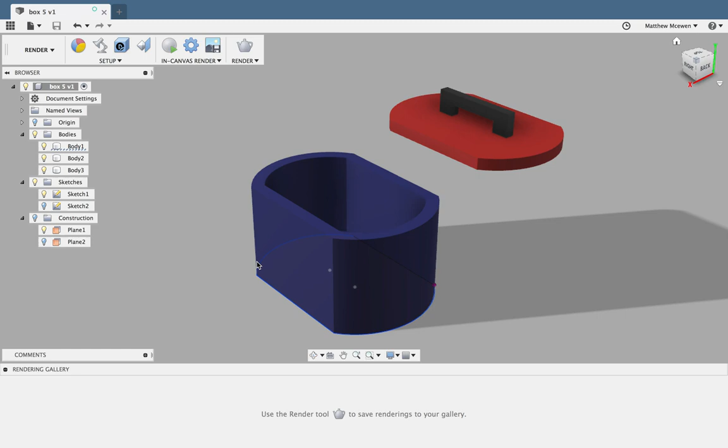So this is how to build a box using Fusion 360. I'm going to show you how to create this kind of a simple box with a lid.

Alright, we're going to start with a new design. I've got to turn on my origins. I'll be talking about the browser, which is up here, and the timeline, which is down here. First, we're just going to create a sketch.

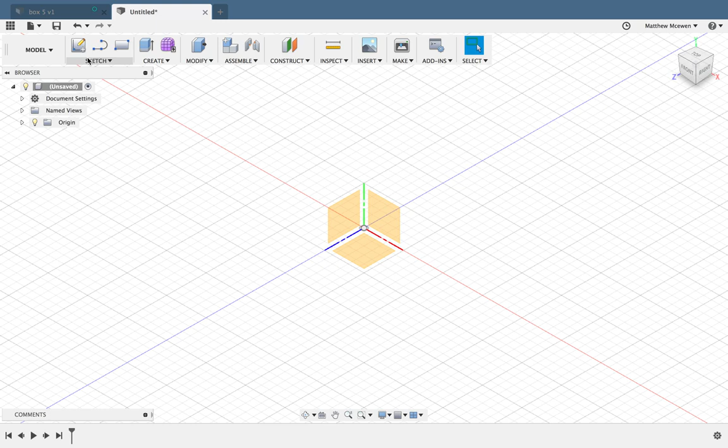Click on Create Sketch. We're going to click on the bottom, and we're going to draw the shape of our box. You could use rectangles, it could be circular, or a combination of those. I'm just going to do kind of a combination. Hit Escape if you don't like the tool you're using.

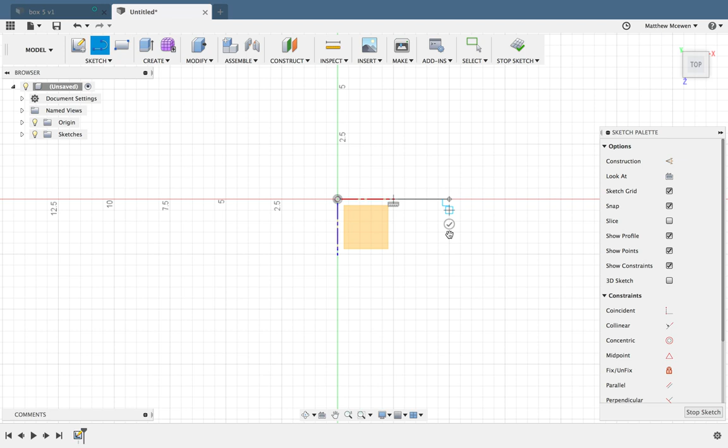L for line. I'm going to draw a line 5 centimeters like that, and then I'm going to get a circle tool, a center diameter circle. I don't know, like there, there. You could just use whatever you want.

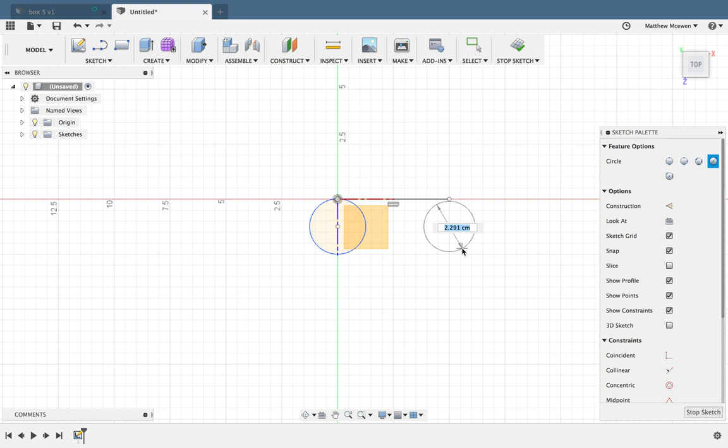I'm not going to do that. I'm going to use the arc because I really just want an arc. Boom. There's 5 centimeters, so let's bow it out a little bit. Do the same over here.

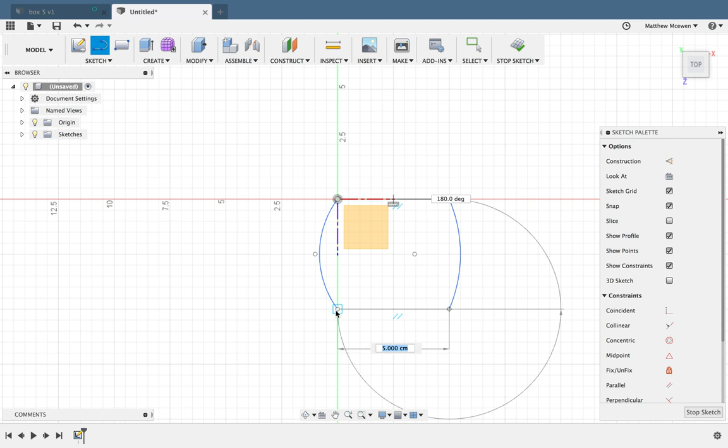Okay, and then I need to do some lines to connect this to this and this to this. Okay, so it is now a shape. I can stop the sketch.

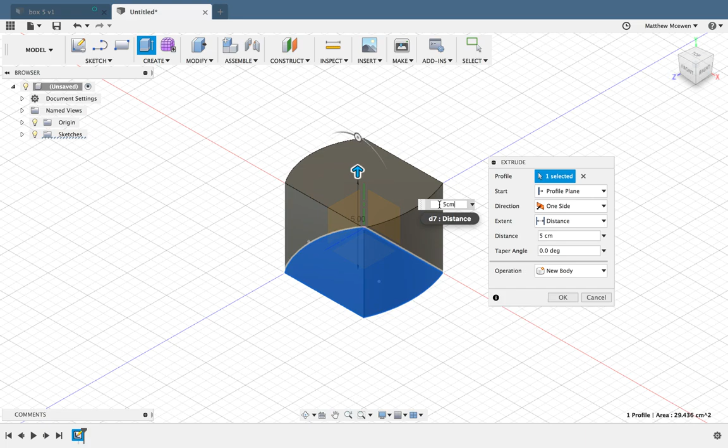I can go ahead and go to the Create menu, and I can create an extrusion using this shape. I'm going to bring it up 5 centimeters, which I can just type in here, or whatever. Notice over here in the bodies I have one body.

I can click on the word Body 1, and it highlights it. I also have the sketch, which is now off. It's the first sketch I made, and there's the sketch, and there's the body extrusion I did.

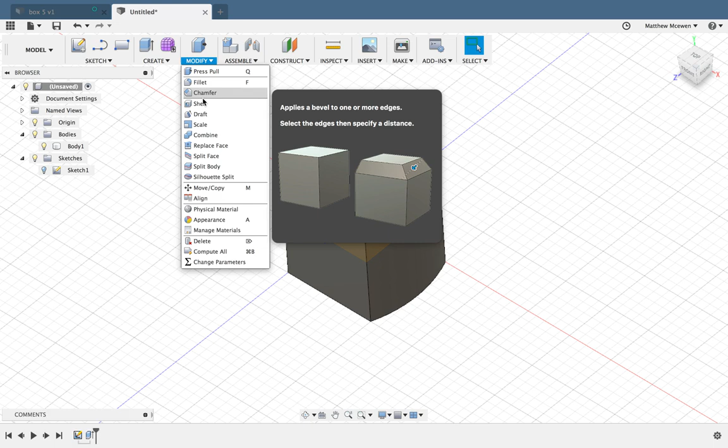Now I need to make the box hollow, so I need to modify an existing body. It's called shelling. It removes material from the interior and leaves the walls. So here's the tool box, asking which face or body you want to shell.

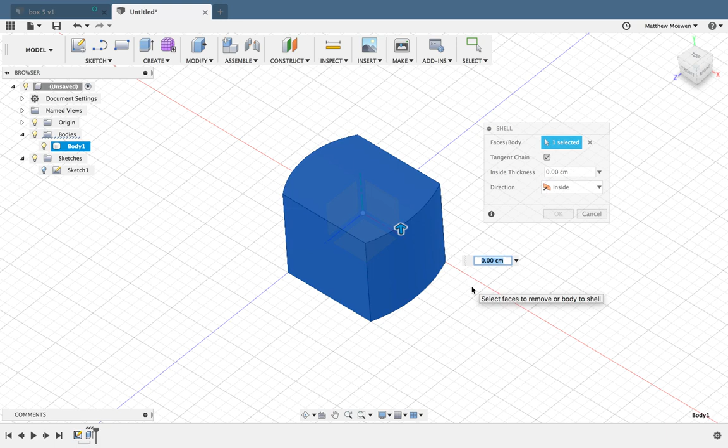So I'm going to go over here and just click the Body 1. If you just start clicking on faces, it starts to pick them, which can or may work, but you see how it says 5 selected? I want the whole body, so I want the body.

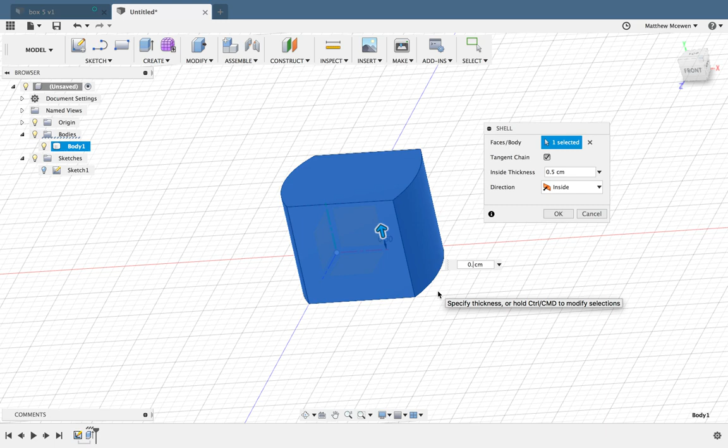And it's just asking how thick do you want the walls. So I'm going to say, let's make the walls half a centimeter - well, maybe a little bit smaller. Let's make it 3 millimeters. Enter. I think that's right, we'll see what happens.

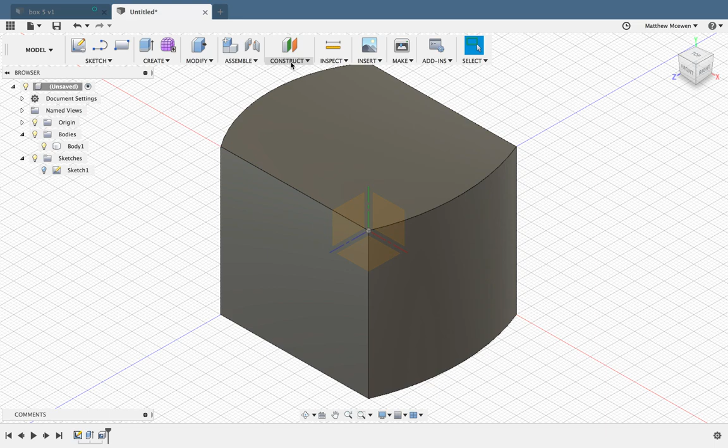Okay, now I need to cut a lid. In order to cut a lid, I need a construction plane that's a little bit below the top of the body. So I'm going to create a construction plane, an offset plane, and I'm just going to make it go down. Let's make the lid half a centimeter.

Hit OK. Now over here we've got the construction plane I just created, and again the timeline's being updated. Now I want to split this body in half using this construction plane as a tool.

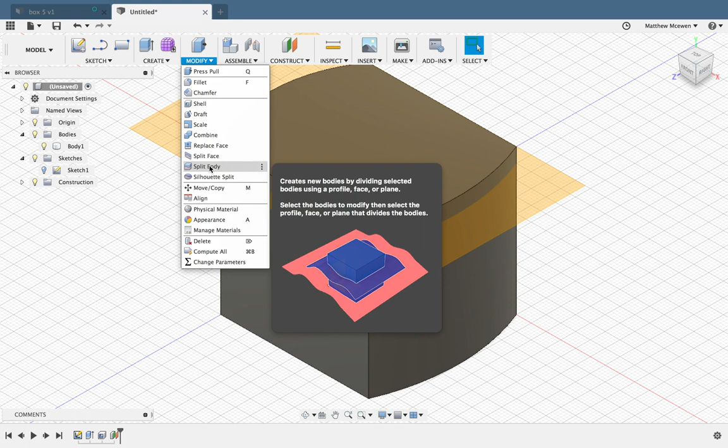So again, in here it's very simple. It says split body, creates new bodies dividing selected bodies using a profile, face, or plane. So again, what body do you want to split? I want to split this one. Click in this tool - which tool do you want to use to split it?

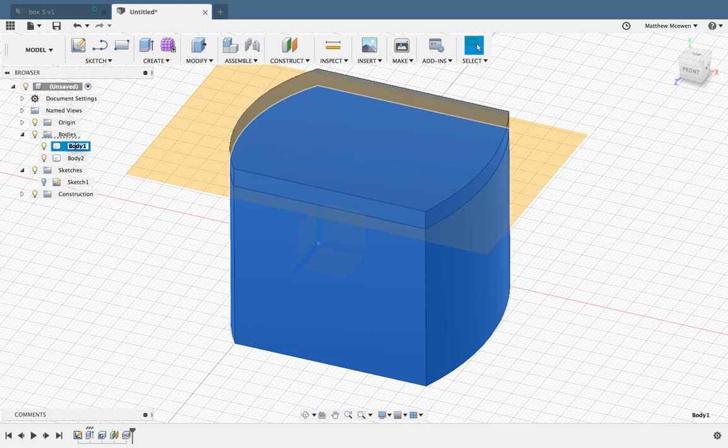I'm going to click on the plane. The cutting surface comes up, and now we have 2 bodies - we've got the top and the bottom. Now I can name this: this is the box, I'm just going to type in the name. This is the lid. Okay.

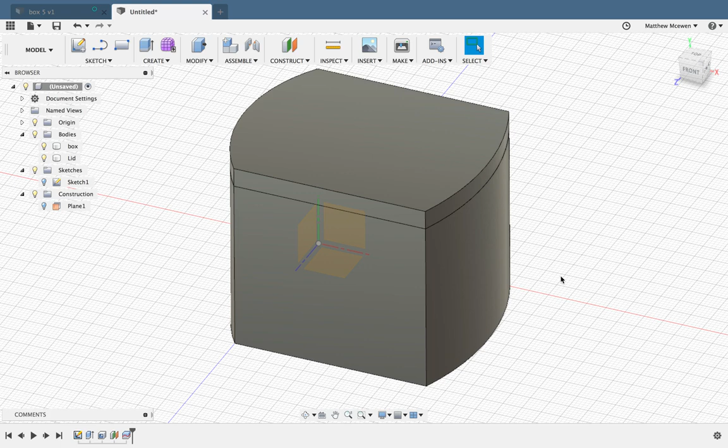I can turn the construction plane on and off if I want to as well. And you can see if I move it, there's the box. Again, to move, I use M. I click on the body I want to move, and I can use the arrow key just to move it out of the way, which actually I'm going to do.

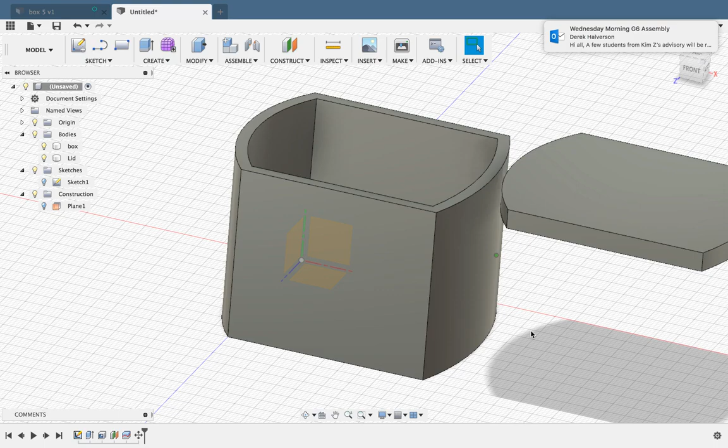There we go. Okay, I'm going to look at the bottom. Good, all right. So I think that's pretty much it.

I'm going to create a little handle here, like I did for this one. Show you how to do that. I need to actually draw a sketch. I could easily use something like this, I could just create a lid like that. I was just using a box, I just created it on top of that.

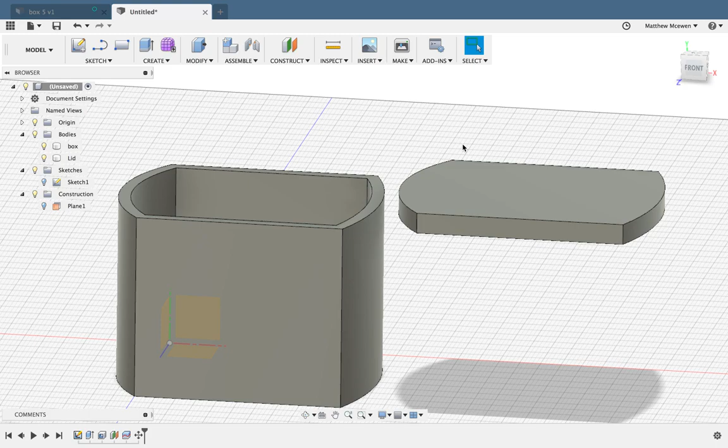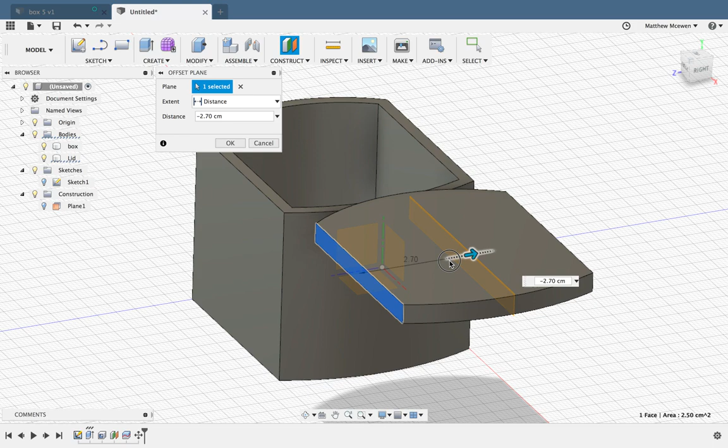Or if I wanted to do something a little more interesting, I need to be able to sketch something in the middle of this lid. So I need a construction plane, not an offset one. Or actually, I could just do an offset plane. I could push this into the middle, which I know is 5 centimeters across, so I know where the middle is. But there's also a choice for a mid-plane, so it creates a plane between two faces. If I click on both of these, do you notice how that plane just appeared in the middle? Now there's a construction plane right in the middle over here, done in the timeline.

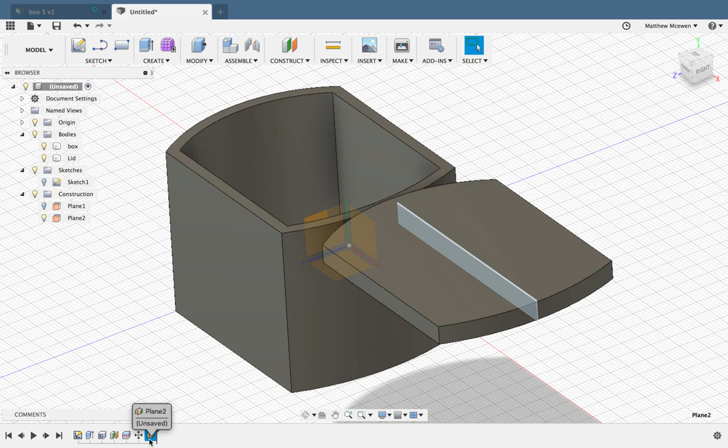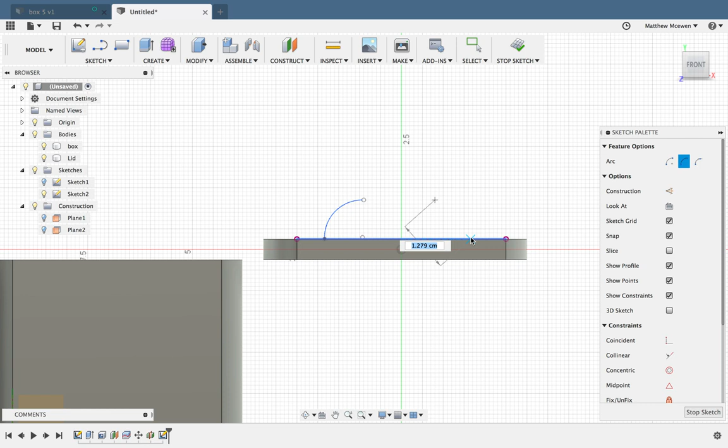So let's say I want to create a sketch on that. Boom, okay, come over here. And then I can create the handle just using some of the other tools. Let's see, I don't know. Boom, boom, boom, I really should be measuring this. L for line. Boom, boom, like that.

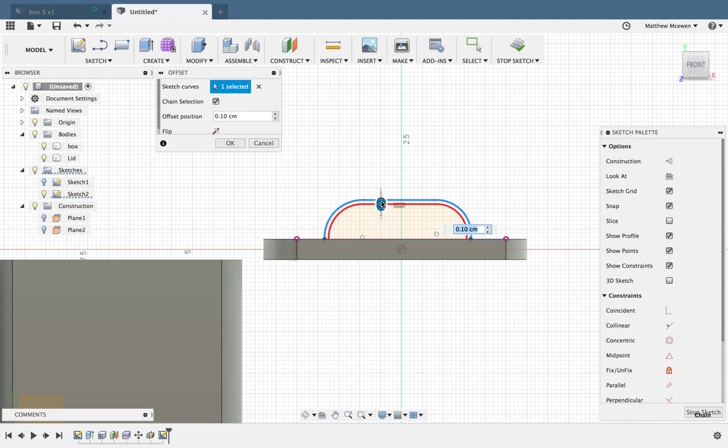Ooh, there's a really interesting one called an offset in the sketch menu. If I click on it, it'll offset that same sketch or set of lines. So I can just push in here and push enter. And look, now I just need to make some lines between these 2 points. 1, 2. Oh. Ooh. Interesting.

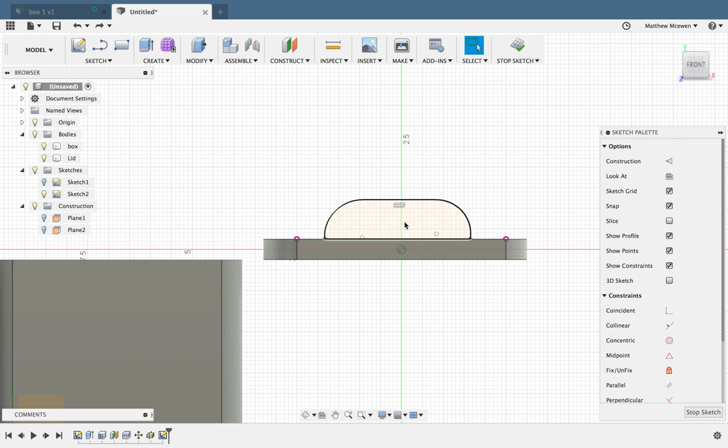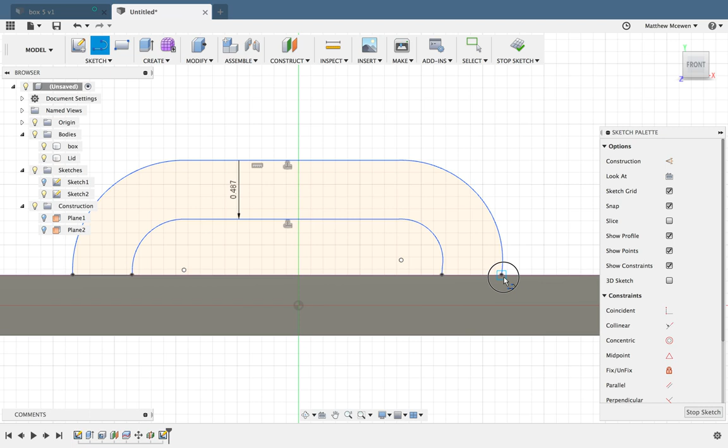I'm gonna try that offset again. I don't think I went all the way down. Offset, click. Hit OK. Oh, it didn't pull it down. So I guess we'll just have to create lines. Get in close so you can see what's going on. And do that. And stop sketch. Okay, as long as it highlights blue, you should be okay.

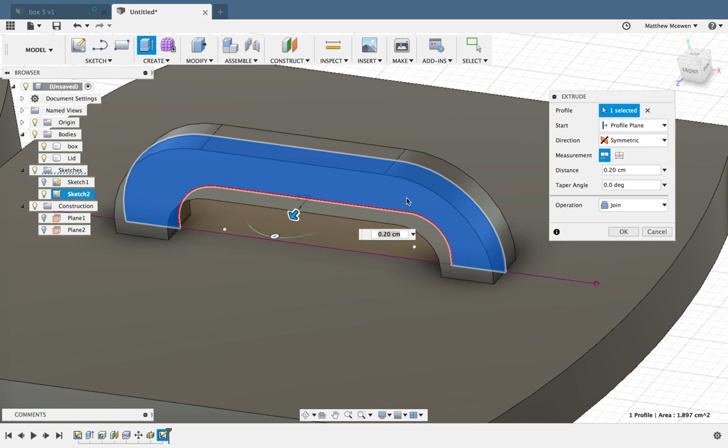So now I've got this, I'm out of the sketch menu. I got this handle that I want to extrude. Okay, and just pay attention right here, it says direction one way. If I pull it this way, it's going to make it one way, but if you click on this symmetric, it'll actually do it both ways. How's that look? And join, I'm going to join it to the lid. Boom.

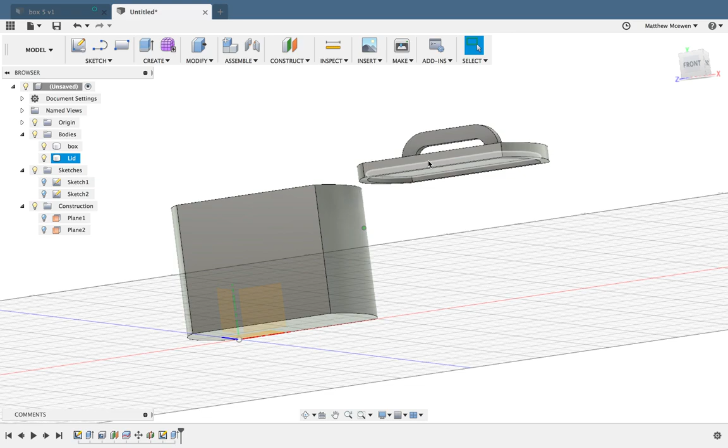Let me back up with the home button. That looks nice. Ooh, and I want the inside, I want this to fit on top of this. Okay, like so. I want it, when you put the lid on top of it, I want it to have a bit of a lip that seats in it. So I'm going to actually extrude this down. I'll show you what I mean.

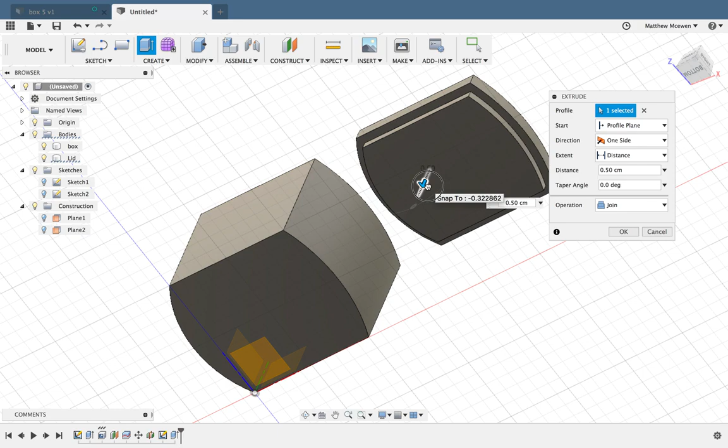Extrude. If I do this, then that will come down and it'll fit on. But the problem with 3D printing is this won't fit, it'll be almost perfect, but it'll be really tight fitting. So I'm gonna do one thing differently.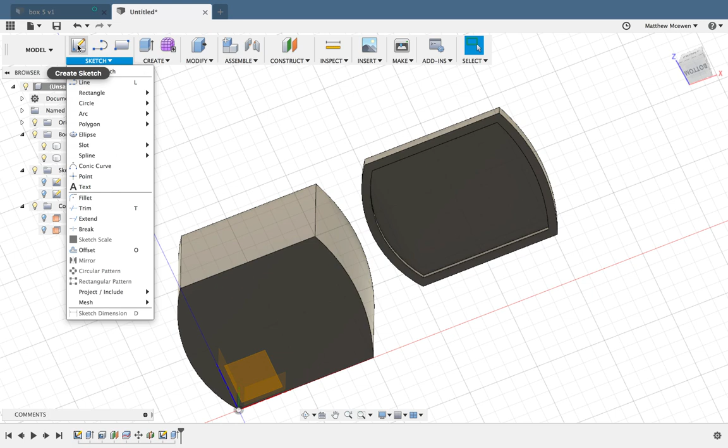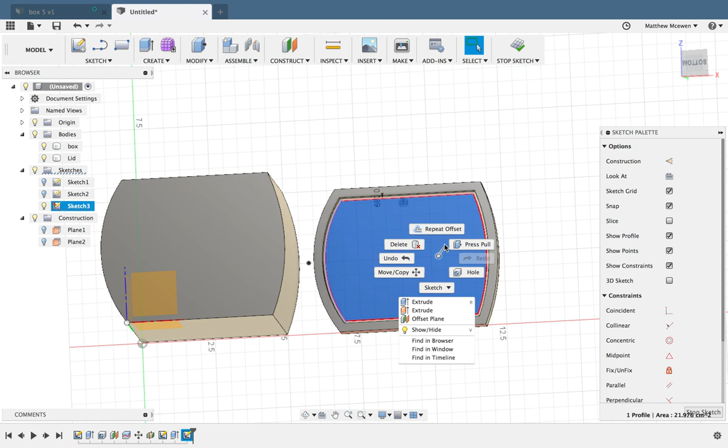Instead of using this set of sketches, I'm gonna highlight all of them so you can see. Instead of using all that line, I'm gonna offset it just a little bit. So sketch, go into the sketch menu, I'm gonna click on it, then I'm gonna click on offset. I'm gonna click it, and I'm gonna bring it in a little bit, so it's just a little bit smaller than the original one. Now that's the one I want to extrude. So I'm going to extrude that.

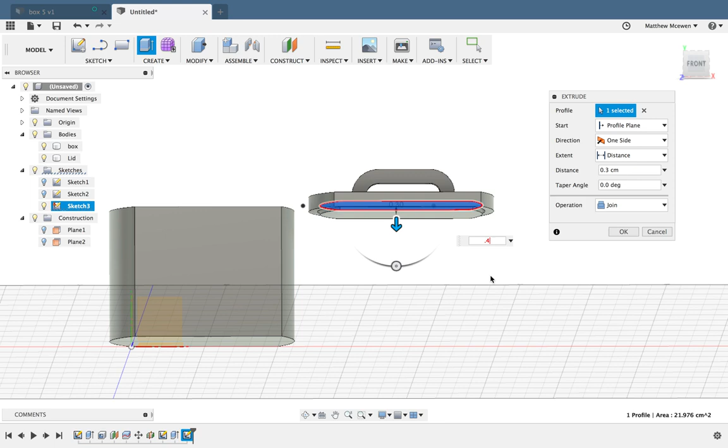Let's see, if - oh, that's way too much. We just need a little bit. 0.2. 0.3. 0.4. Okay, there we go. All right, so now I want to print them.

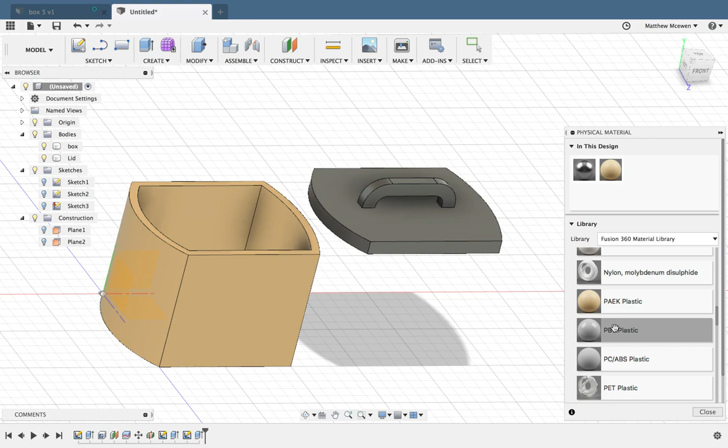Oh, if we want to modify what it looks like, you can go either to physical material or appearance. And I'm going to go to the plastic, here's some plastic, make the lid will be black. And that's basically - it's ready to be printed.

Okay, so I've got a box here. I'm going to click here. I'm going to control...

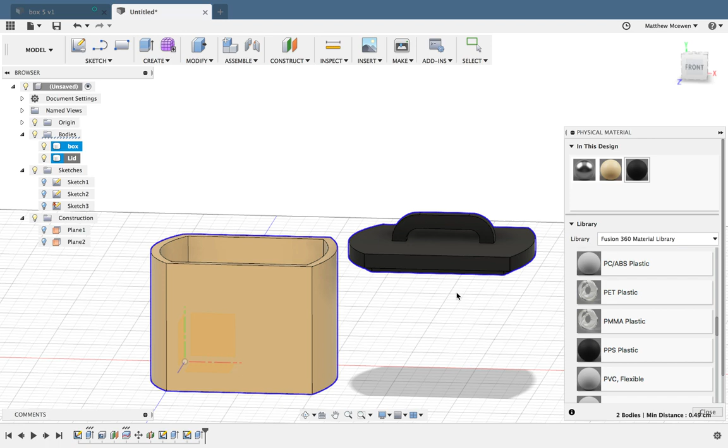Okay, so if you want to print these two pieces, right click on it and save it as an STL. Just say OK, and this is the box. And then click on the lid, control click, save as STL, hit OK, and save that.